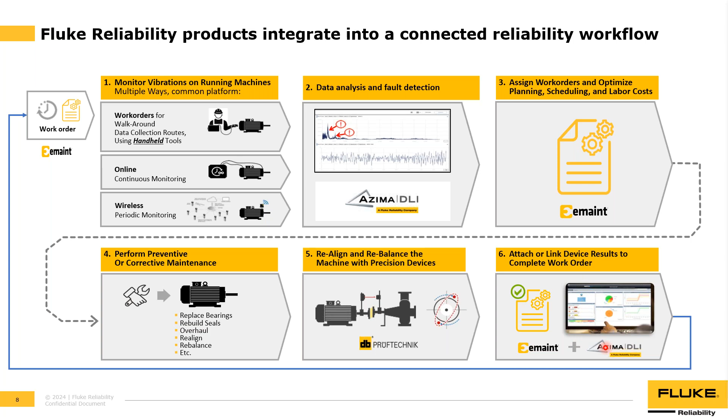Today's agenda is really focused on where the evolution has taken us and those challenges that we are now facing, and then we'll present a couple of options for some potential solutions to this.

Okay, so evolution. I like this slide. This is when I started in the vibration world in the late 80s. We had just transitioned over from what we used to refer to as the cart and cable days. Manual analysis, very engineering constrained, lots of technical knowledge that was required in order to really understand what is going on with machinery.

This is where DLI really got its start. This is on top of an aircraft carrier. That's the ocean right out there. And we would analyze machine data on these ships. It took a couple of weeks to get through about 400 machines. And then we would spend a lot of time going through that data, manually analyzing it, figuring out what could be going wrong with the machine.

We would bring all that data back to an office, and a receptionist would type up all the notes from the engineers that say, hey, these are the faults that we've identified.

The Azima DLI model was drastically different than where everybody else was going in the industry. The way that we approached analysis, which is still true to how we programmed our software and our automation to support this, proved itself out pretty much right away. And it's a natural order of how things got proven.

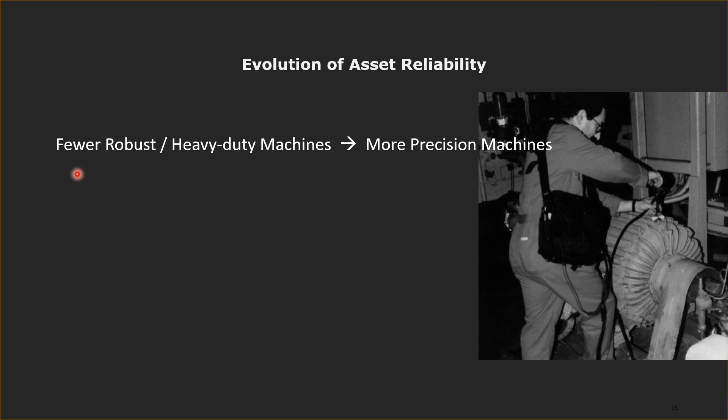If we look at how things have progressed, there used to be fewer machines that needed to be monitored within a plant. They were more heavy duty, way more industrial. Today, machines have a lot more precision, which makes the technical challenges to do analysis that much greater. Machines used to operate basically on or off. Sometimes they were slow speed, fast speed, but they would generally always be running, since you had fewer machines that you were concerned about in a big production plant or factory. But now there are lots of little on-demand variable speed machines. Again, this makes the technical challenges harder, especially when we have more technical constraints with our resources.

Though I said before there were fewer machines, more heavy and robust, there were a lot of redundant assets. Plants operated back in the day where you would have big maintenance downtimes, time for the maintenance team to go through and ensure that the machines are operating in the best operational state. And there was redundancy in those. And now plants are operating way more lean, going from short cycles to 24/7 operations.

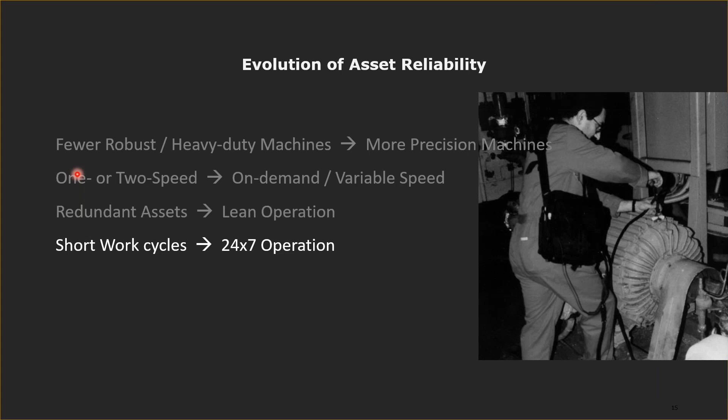Before those cart and cable days, you had the old school analysts that would have the screwdriver pressed up against their ear, trying to listen to what's going on with the machine. And that human analyst is a very sophisticated analyst if they've been around those machines and understand all the nuances. If you ever look at an old submarine movie, you would see the person who managed those two big diesel engines. That's all they did. They had two machines they were responsible for, and it was almost like osmosis that they could sense that a bearing needed to be greased, or something might be going wrong that needed to be adjusted. And nowadays, given how lean we operate, it becomes very hard to do that without sophisticated technology.

The operators are responsible for a lot more machines. Technicians have to maintain a lot more machines than they did in the past. So we went from the ability to troubleshoot what's going on, to a tool that would allow you to say yes or no, this machine is fine, the broadband meters of the 80s, to something with a lot more trending, some understanding about how vibration is progressing.

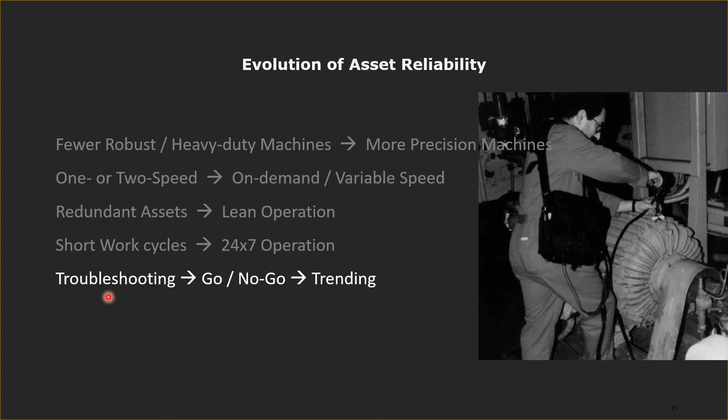And when we think about it from a vibration analysis perspective, troubleshooting is far harder than it is to trend. If I can see a fault progressing in its early stages using narrowband data, something that requires an analyst to look at, it's easy to identify how fast that's progressing, where it's coming from, and what actions I need to take. But once that machine becomes very problematic, looking at that same data is the hardest, because now you have a lot of things going on that are represented in that vibration data. So troubleshooting is one of the most challenging things a vibration analyst can do to figure out what's going on.

So then we went to how often data is being captured. In that Navy example that I mentioned, it was annual. They understood that they couldn't wait until the machine was having a problem, since it is a warship as a whole. They needed to have the data captured very frequently. We came on board once a year to look at that data. And what they recognized is when we delivered those results and we said, hey, these machines have a fault that's developing, they immediately recognized somehow they're going to have to get somebody to capture that data more frequently than once a year.

And so portable data collectors like this one came out in 1986. This is that same ship moving forward, where technicians and operators would be enabled to capture the data and then deliver that data to an analyst to provide results. So going from collecting data once a quarter, then to collecting data once a month. And nowadays, with sensors in place and the way that plants are operating, data is being captured daily or sometimes more.

So if you think about the challenges that a customer is facing, I need technical knowledge. I have a technical expectation to look at that data. And I used to do it once a month, typically for the last several years, to now I'm doing it once a day. So now I have 30 times more data that needs to be analyzed, just further feeding into our resource constraints. And the analyst has also had a bit of a journey.

First, there's a lot of certifications that were necessary to get an analyst up to speed. There's several: Mobius, Vibration Institute, Technical Associates, here in the US, domestically, internationally, I'm sure there's several others out there that certify the people that you have on staff. This is a blessing and a curse. Getting that certification, being level 4, the highest level of advanced understanding of vibration analysis, it's a very marketable job. It's hard for a plant to keep that technical expertise on staff. So you need certifications. Certifications are hard to get, and once they're achieved, it's hard to retain those people within plants.

We've gone to lots of machines that operate, tons of data now coming in. And it's not just the machine data. There's a lot of process data surrounding what's going on in a plant that your analytical team is expected to decipher and understand. We've dumbed down the system, in my opinion. We are looking less at the high-end technical vibration that can give you telltale indicators of what's going on. As I've just mentioned, we're moving backwards on that path to just say, hey, I have a go, no-go situation on a machine.

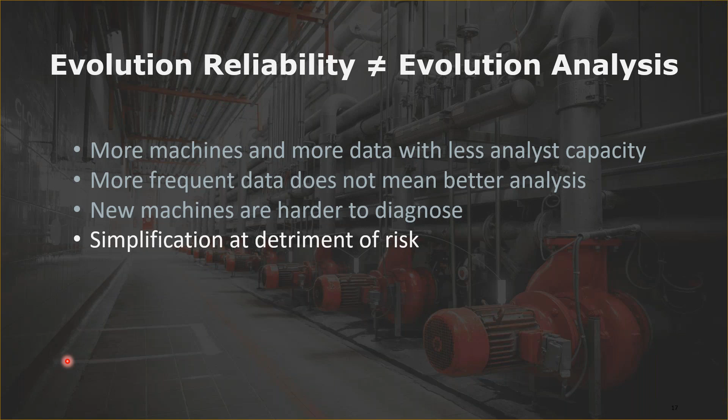And in the way that data is being captured in order to handle this frequency, it's definitely not a direct relationship. A simple sensor that is not capturing that high resolution data is just blind to the way that different machines can fail. So more frequent data doesn't necessarily mean that you're going to get better analysis. New machines, significantly harder. We're simplifying to the detriment of risking understanding what is happening within production. And as I just mentioned, harder to retain the staff that we have.

A couple of numbers I'm just going to throw out here. I thought these were really fascinating as we were researching what the challenge is. One of the questions I would get as we're talking through this is, I don't necessarily see it. I hear about it, or I'm feeling like we're just overworked, but I don't really understand how big of an impact there's going to be. And there's a lot of concern here. There's a lot of studies out that are really helping us prepare and understand what we might be facing as we move forward.

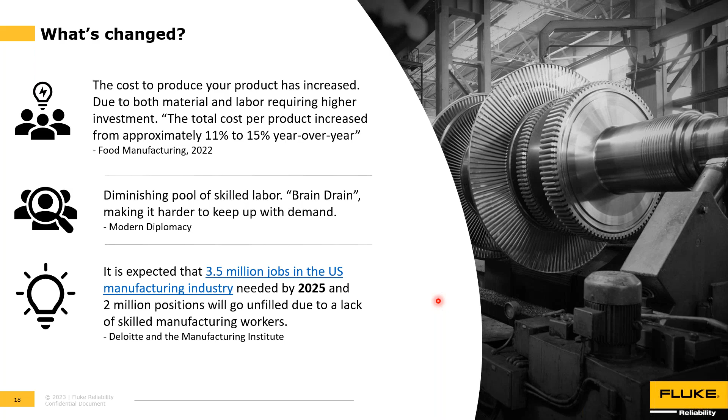How much of the production staff is going to be not available? How much more production are we expected to get? How many jobs are just naturally going to be lost? The number of manufacturing jobs: 4.6 million jobs will need to be filled between 2018 and 2028, where we're currently sitting right now. And these are skilled labor jobs.

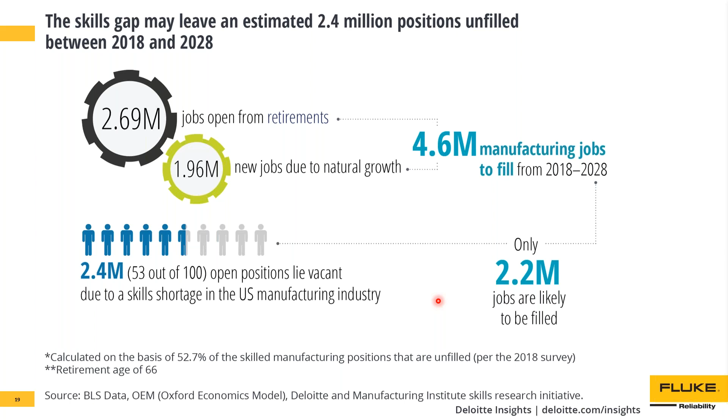There's such a progression of workforce that is set to retire that we have a gap in how many people we have available to fill those jobs. And the technical challenges are not filling those jobs with other technical resources. Getting people certified and into a maintenance role is very hard to do with the new generation of people coming out and going through universities and the like. So I thought these were fascinating.

85.2 million jobs in a global talent shortage. It's 54% of the companies. It's $8.5 trillion. This is the number that I thought was most fascinating: 10,000 baby boomers are set to retire every day over the next 19 years. And it's manufacturing jobs. 8 million of those are manufacturing jobs that are going to be unrealized by 2030.

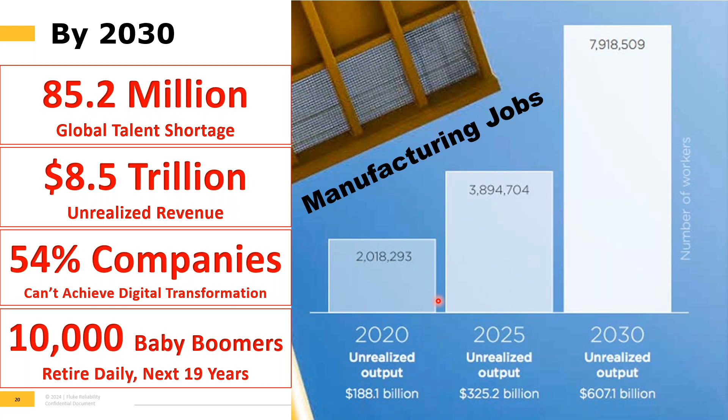Okay, so where does that lead us? One thing that's clear in those messages is that it's not like we can all of a sudden have a workforce available to us again. So we have to step back and really think, how do we do things differently? How can we leverage technology today that prepares us for what's going to come? And it's nice that we know that this is coming. We're in the midst of it now. There's a lot of customers that have reached us saying, hey, this is what we have currently going on. But knowing that this is something that we can solve, I think is going to be very relieving for those that are going to be coming across this here soon.

So I broke this down into 3 things that we would really want to define here. How do we capture the data? How do we analyze the data? And how do we really deliver those results? And I first started this thinking from a product management perspective, I have to set this as a set of requirements. And so talking with our different customers, talking with what plants are really facing as challenges, talking with the analytical teams on what challenges they're facing as well, I came up with some requirements. I broke down the 3 of those into these.

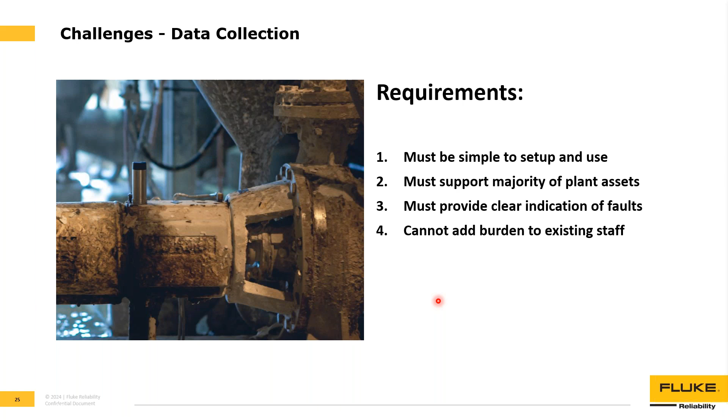And I think wireless is important to talk through because there is just a tremendous amount of conversations about wireless vibration today. And it's a confusing, complicated market. Wireless devices are kind of all over the map. There's a lot of confusion about what you really need or what you gain from different wireless sensors that are out there. I think there's some 250 plus models of wireless devices. So I could break it down kind of simply.

If you're thinking about a solution to how you gather more data and to solve this constraint, you need to make sure that that device is still achieving your objective. If you want merely a traffic light that says the machine is red, you'll send your maintenance team to just take apart those machines and then go back to a troubleshooting state. And there's certain machines that are certainly fine with that.

If you have a throwaway machine, a traffic light is perfectly fine. You don't need to know what specifically is wrong with the machine if you're just going to throw it away anyway. If it's a more expensive machine, something that you're going to want to repair, then whatever device you are putting in place needs to be able to identify that repair for you.

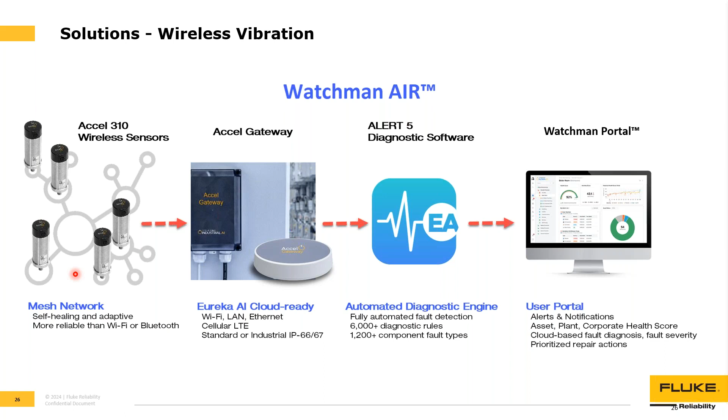Most plants, if they can't install devices onto every machine, either wireless vibration sensors or advanced online systems, the simple approach is usually a portable data collector. When you consider portable data collectors to solve this resource constraint, the data collector must not add an additional burden on your staff. Meaning, if the vibration data collector is an advanced instrument, then there's training and knowledge needed to operate that. That's a certification to be able to capture data using an advanced device.

So thinking through what it is that you really need out of this program, when you're considering a portable data collector, think about the simplicity of how you use the device. Is it built in a way that a technician and operator can capture the data? And is it built in a way that you can then deliver that data to wherever you happen to have analysts? Maybe you have a team of analysts at one plant that you would like to leverage.

Maybe you have a headquarters, a centralized program. Maybe you have contractors that you can use, and you don't want to rely on the contractor to only capture data when they're there. You want to utilize your staff.

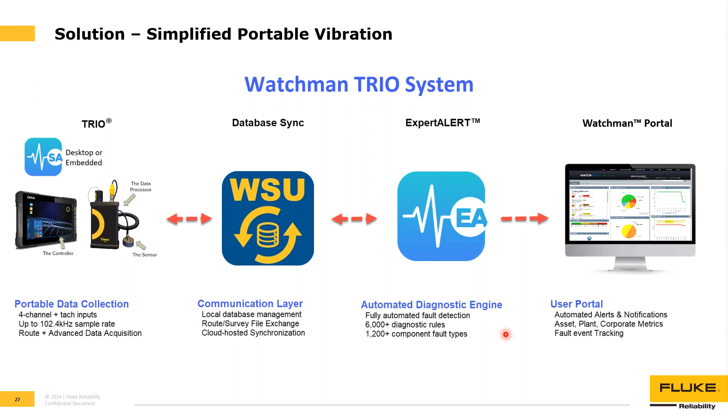That's certainly a capability if you want to outsource completely. This is where we have spent a tremendous amount of our Azima DLI talent, in managing vibration programs in this very capacity. Data comes in from technicians or operators that are enabled to use a portable data collector, and is then transmitted to analysts, geographically diverse wherever they happen to be.

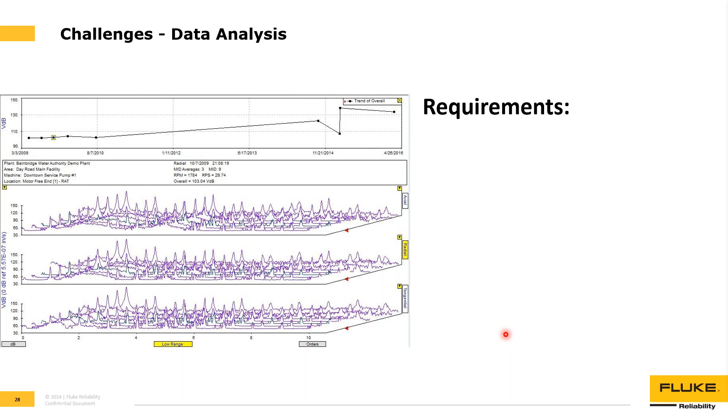As we think about the analysts themselves, there are, again, certain requirements that we should be thinking about. And so when I set these out, there are 4 or 5 requirements here that I've defined. Analysts have a huge challenge. When you look at data like you see on the screen here, it's very technical, very challenging to look at this in a way that can define what's really going on in the machine.

Analysts have a lot of tools that they can usually leverage in all the different softwares that are out there to try to simplify it, get through volumes of data as they have to do, and identify just the big things that need to be resolved. So when you're thinking about your analyst's requirements, the analyst must be able to scrub through volumes of data, especially as we're moving forward with capturing more data than once a month or once a quarter.

That software capability for an analyst must be able to deliver it in a way that they can see prioritized actions, things that are the most important that they need to look at today, things that they can get to later in the day or tomorrow, or things that they could automate and just say, I don't need to look at this at all. There's no reason why, with today's software capabilities, you shouldn't be able to pass through things that are nice and healthy. A machine that's operating beautifully shouldn't have to consume an analyst's time.

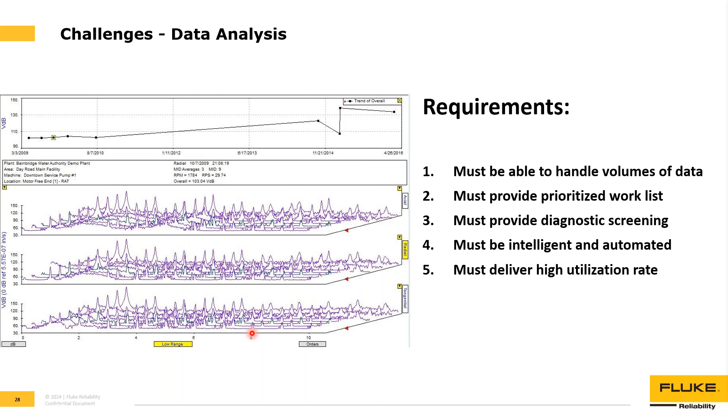So the analyst's requirements are really: I need to be able to understand what's going on, be able to trend early faults, prioritize that list so I know what I have to look at urgently, and have something that automates the screening of that in a way that's super intelligent, that can identify this is a fault, this is the confidence in that fault, this is what I really need to do. And we have to do this with a very high utilization rate, given the amount of data that's coming in and the constraint of having resources on staff.

For us, we look at this as a workflow progression. We want to be able to set up the devices in a way that feeds into that degree of automation. As I said right at the very beginning, from the early days of when we took on vibration analysis, we looked at it from a different perspective than the traditional approach of getting a set of data and then testing the data for various faults. What we do is define what is a normal and healthy criteria of a machine and identify every pattern that deviates from that. And our diagnostic engine then says these are the types of patterns that represent various faults, and this is the priority and the severity of that particular fault.

So it's a very automated way, but what it requires is setting up the system in a way that can enable that automation. So we approach this a little bit differently in setting up an asset, installing sensors and devices, and then training that to say this is a representation of normal and healthy. There is a predefined list of rules and conditions. It's been trained to analyze 1,200 different faults.

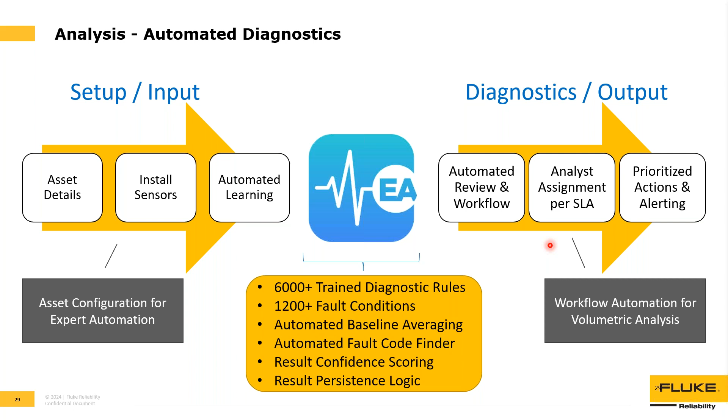So the output of this for an analyst is a ready to go, prioritized action list that they can work from. These machines have been identified as having a fault. This is the particular fault. This is the severity of the fault. And all the analyst needs to do is review to make sure that the system is accurate. Not having to analyze the data per se, but review the result that comes out of it and validate if that's true or not. And so it's a great starting point for an analyst to get through volumes and volumes of data.

So technology here really is an enabler for a solution to that skill constraint. And just to illustrate that last point with some numbers, we review this about every year as we take in the count of how many machines we look at from a services perspective. We analyzed last year about 560,000 machine tests. From our analyst staff, we get a utilization rate of what they're capable of doing, and then our direction of how we improve upon our software applications to further enable that utilization.

There's a benchmark number that we always start with, which is the industry standard: if I have an analyst on staff and I'm just bringing in raw vibration data, an analyst needs to look at that data, identify what's wrong and write up a report. An analyst typically can get through about 25 machine tests in a day. That's about the industry standard for what you can expect doing manual analysis on your machinery.

We have this automated diagnostic engine that's been, as I said, pre-trained with diagnostic rules. We build a representation of what's normal and healthy. There's a bit of a learning process here where we analyze data, we further define and refine the tooling, the way that it's going to create accuracy in the data, verify that. So there's a path here, and we build it into a template.

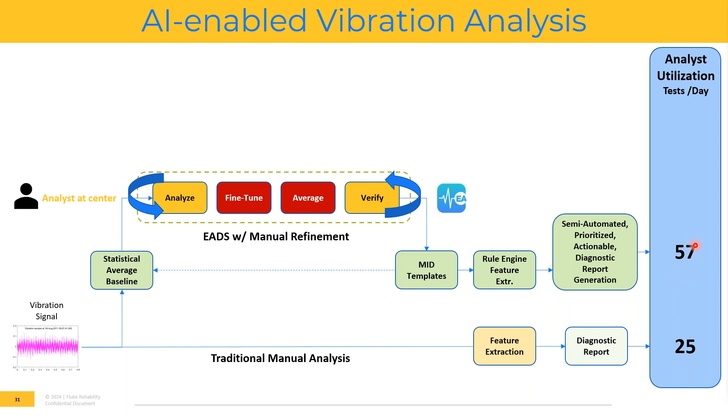And now we've applied AI into this mix to automate a lot of this refining, filling in gaps, building that template that says it's normal and healthy. The analysts merely need to certify and lock down that template. They have a workflow management tool that allows them to see all of those machine tests, those 50,000 some machines that come in, and automate that with a lot more tooling, such as logic that is persistent. It tells them what the fault was before and how it changed, and confidence to know what needs to be addressed and resolved.

And so our number today has been about 152 machine tests per analyst per day. So about a 5x increase over what is traditional. So this is one way we can ask: can we apply technology in a way that would help us with this resource constraint? These are tools that analysts you have on staff could certainly utilize, software that is able to tell them a prioritized actionable result that they can then turn into an action that somebody needs to do.

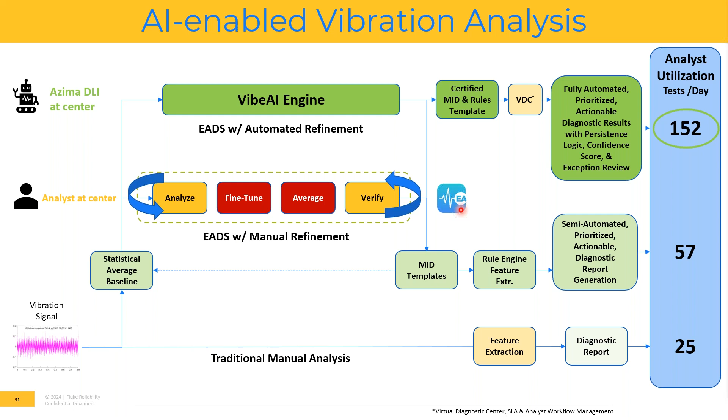So from a resource constraints perspective, I'm not suggesting at all that we would remove the resource altogether, but you have to utilize them in a more effective way, so they can look at data, know that they need to look at that data, and have an answer to what the software is telling them is wrong that they can validate very quickly, as opposed to having to scrub through the data. We present this in a way to an analyst that gives it meaning.

So using those diagnostic rules and the templates that have already been pre-trained, having a statistical average of what is normal and healthy, an analyst then gets a list of here's what we think is wrong and why. Here's the severity of that fault and why, and then what needs to be done and how urgently it needs to be accomplished. So it's very easy for an analyst to say, hey, I need to look at this first. This is what I'm specifically looking at.

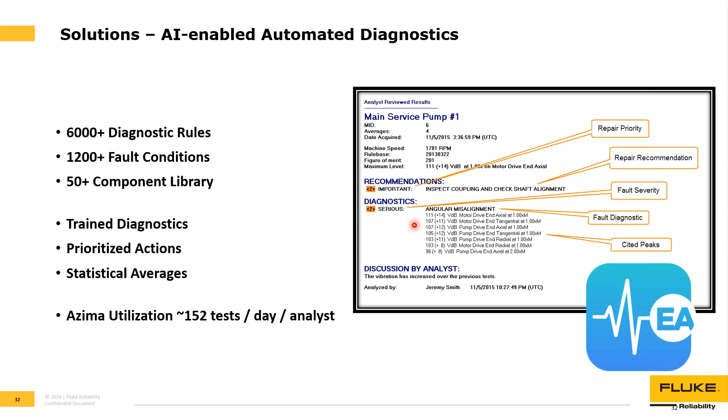Do I believe that the system is coming up with the right answer? And they can merely adjust and steer the course. From our analyst team, we do this very meticulously in a way that we track everything that they deviate from what the diagnostic system says, so we can constantly improve upon the accuracy of that system.

To relay that accuracy, what our customers generally get is a result that provides them with what is the fault, how problematic is it, what needs to be done, something that they can take action on and assign it to other users, but also comes with a level of confidence. We are highly confident that this fault is accurate, and you have a completion score of how much data you have for those machines to be able to generate that accuracy.

So knowing that you need to have a count for how many rotor bars are on the motor gives us more diagnostic capabilities that we're able to identify. So if there's a fault that might impact this, our confidence might then be low that we think that there's a fault. We'll identify what that is, the end user would see the confidence of that and be able to steer the course. Can we do something else to make sure that we're confident in what needs to be done?

And then of course, everything comes with a level of analysts' commentary so that you can put it all within context. So these are some of the things that we have thought about in the analyst capabilities. Last one here, and then we'll get into some questions, is the requirements for delivering those results. And there are 5 of them here as well.

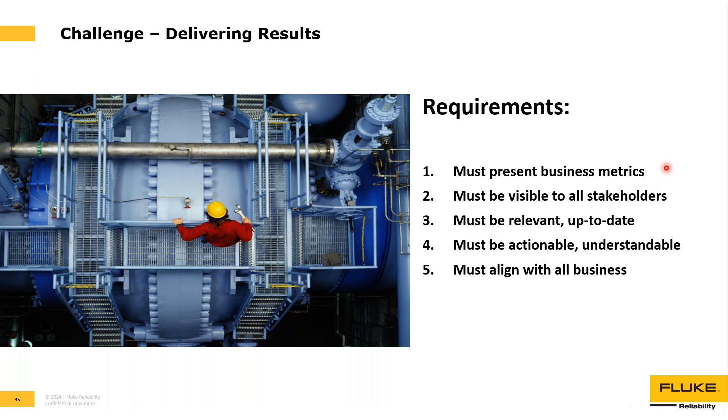So we looked at it from a centralized program, putting the system in place that enables us to leverage as much knowledge as we can across different aspects of the business. And we put it in a way that allows us to really build this as an ecosystem, bringing in data from a variety of data sources, leveraging as much knowledge as we can, putting this into an automated system that's backed by AI technology, and then delivering it to users in a way that makes sense,

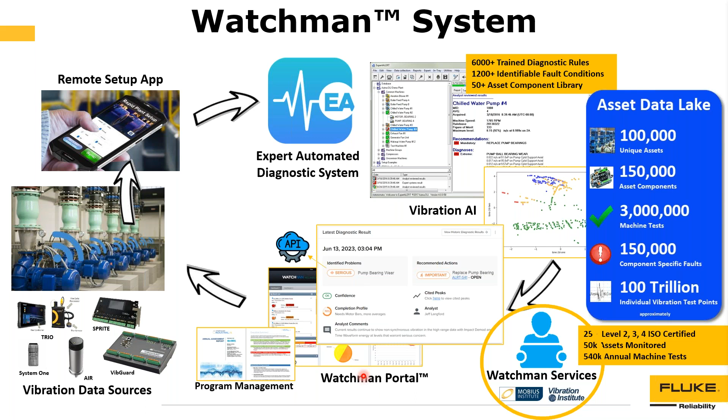that they can take action on. So limiting the amount of resources that you need to collect the data, limiting the amount of resources that you need to analyze that data, and then getting more people involved so they can make informed decisions. And we can do this with our services as our primary means to be able to handle the immediate requests that customers have to solve this as a problem.